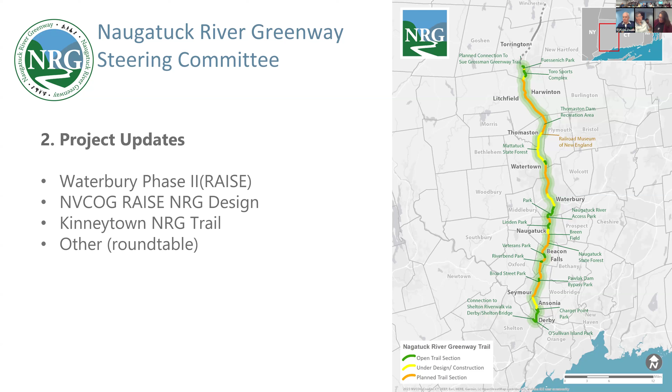Have you obviously given money out already? Yep. Has anybody completed anything, or have they actually spent the money yet?

Oh yeah, it's for small stuff like bike helmets and things like that. There's been a lot of events in different regions, mostly bikes and helmets is probably like 50% of the items being purchased with the money - things like bike rodeos, they give them out to the kids and things of that nature. A lot of the money has been spent.

That's great. I know the town of Warren did a back-to-school bike event - they all met and rode their bikes to school. It was kind of cute and there's a bunch of photos.

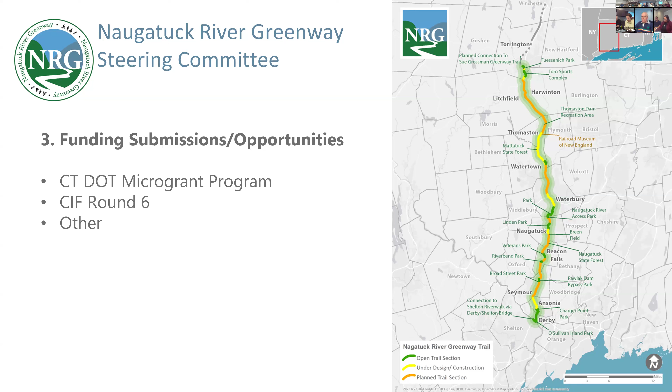Event and public outreach: the Connecticut Trail Symposium was October 4th, at Manchester Community College. I thought, maybe I'm a little biased, but I do think it was a great event. We had some great presentations and a lot of great feedback. I think people enjoyed the tabling events.

I know Kim sent out a survey to get some feedback, and we're going to be meeting in December to regroup and start already planning for next year. I don't know if Kim wanted to give any more of an update, and I would love to hear from anybody else who attended, to what your thoughts were on it.

Yeah, and I know we had a great response for the NVCOG presentation as well. So for everyone who put forward presentations, I'm gonna try to get that disseminated and the information back out to you. Great feedback. I think what we acknowledged as well is the need to increase our timing so that we have things planned out and information released a bit earlier. We get a little constrained as we see how other groups are doing it.

I also went up to Mass Trails to see how they put forward their event. It's huge, but they also have a staff, I found out Massachusetts has a staff of 10 people. They've increased from 2.5 to 10 people within their trails program. But it was a great opportunity to really see how they ran things. And I'm working towards, I've been given the approval to get at least a seasonal staff member, who I think it's a great opportunity for someone working for a subset of time, for really networking and potential job opportunity growth.

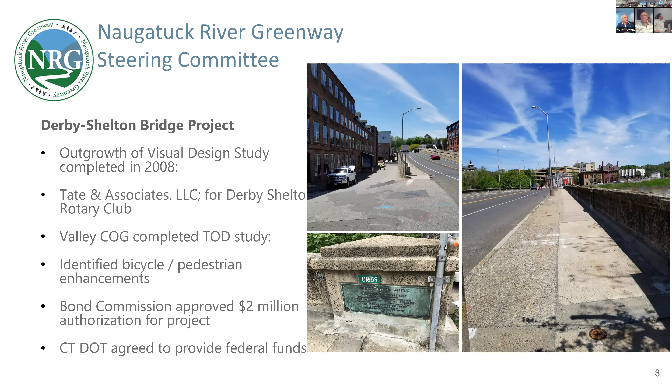It's the exact same width as it was. It's like an optical illusion, but people do think it's a wide bridge. It's not. Before, I think the sidewalks were 8-10 feet, with 8-foot shoulders on either side and 12-13 foot lanes. The lanes were even wider. So it's like you didn't need all that space, and you don't want people to speed across there anyhow, so let's narrow things up.

There are planters along between the cycle track and the lanes that will eventually get planted with something. We're thinking probably not until the spring, given the time of year, but that should be really nice. And I think the parapet wall, they did a real nice job on that.

Great job. There's a YouTube video from the dedication yesterday as well as on Facebook, and several other videos with flybys, so you can see it from all kinds of different angles. If you go out to Facebook and YouTube, you'll find it.

Move on to Route 34.

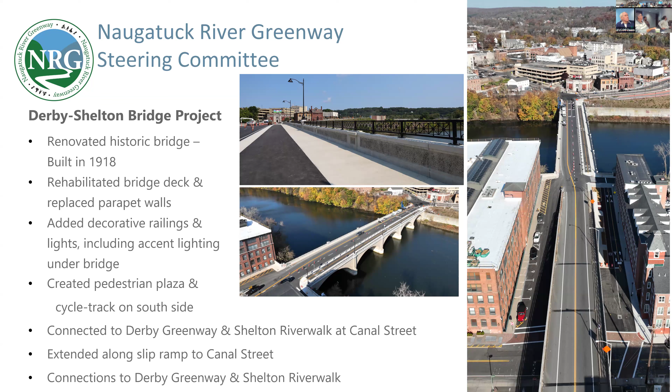I guess I gotta stand up because nobody's here otherwise. Oh, God.

Yeah, so anybody who's driven through Derby in the last two years- there are slides here, one for the purpose of engagement and interactions. First of all, because I don't think everyone knows me, I'm a professional engineer.

I've been with the COG for about 9 years. I have experience with DOT, I've worked for DOT, I've worked for a municipality, and I've worked for two different contractors, mostly on road jobs. So this is how I ended up, for the COG, managing the Route 34 and bridge project.

The Route 34 widening has been in the planning stage for at least 15 years, like since 2009, and Mark's gotta help me out because it was before my time. Let's say at least 15 years, yeah.

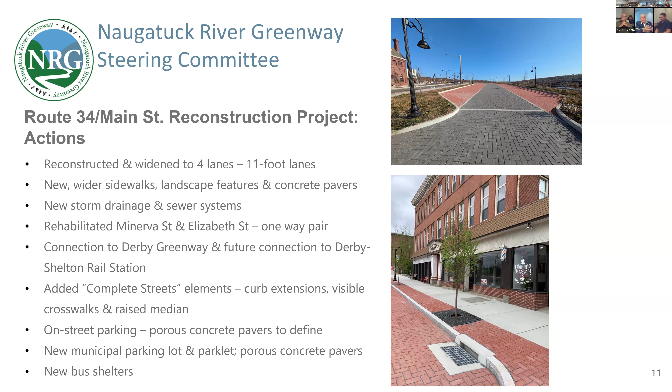Right now Derby has that apartment building, right there. You saw it when you came in. He's already taking reservations, so he's doing some inside work, and most of the exterior is completed. Hopefully early spring for the certificate of occupancy.

There's another apartment house, about the same size, if you go back. If you look to the right-hand side of the picture and go up, you see a big structure - that's the village. You're getting ahead of ourselves. Oh, okay, well I saw it in a different picture. I didn't see it in the other one, so I just wanted to point out that's already open, and 60% sold in the space of the first month.

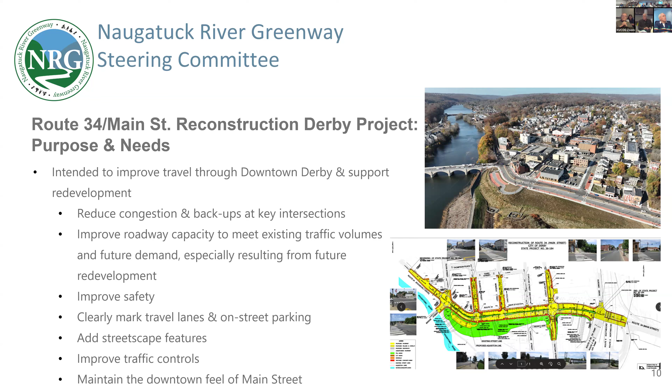We should move on to the fishing pier. Is that me too? Yeah, you can start it. Well, I came in at the tail end, so I don't have too much of the background, but...

NVCOG, how many years ago, 8, 9 years? So back in 2012, the project started when my predecessor, Arthur Bogan, secured an EPA assessment grant. We started assessing there, and while they were doing the testing, a couple issues showed up, so that led NVCOG to secure some DECD funding. They received $200,000 for the proper assessment of the entire island.

I guess we got that money because GE polluted the river, up in Massachusetts. So once we assessed the island, we knew what was in the soil. GE polluted the river with the release of some PCBs, so then they had to pay restitution, or whatever they call it. So they secured a $325,000 grant to be able to build a fishing pier.

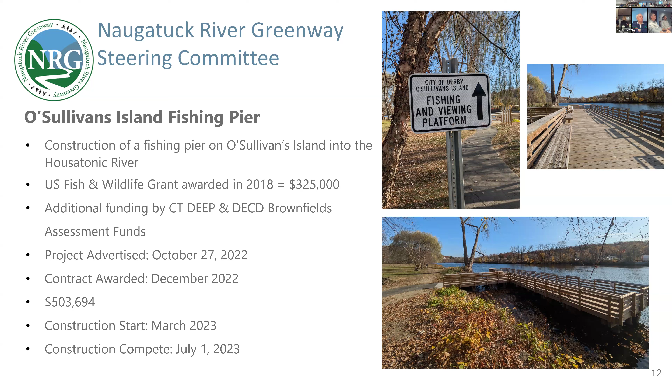Should point out that O'Sullivan's Island is not an island anymore. It used to be, but it was filled in when they were building the Commodore Hull Bridge. And also that stretch of land to the side was the subject of a $4 million brownfield cleanup years ago. They used to do fire training there, but even before that there was a lot of industrial waste dumped there illegally over the years.

So to the point of transit-oriented development in the area, the Derby Shelton train station, along with all of the other train stations up and down the Waterbury line, are under design for really significant upgrades. I'm sure you've all seen news about the state having ordered new equipment for the branch lines, the non-electrified rail lines in the state. One of the elements with that is that we need high-level platforms, which in addition to serving the new equipment will make for faster and easier boarding, and will make all of the stations along the Waterbury line ADA compliant.

Does this have a laser on it? It does, but it doesn't show up on the screen.

In addition to a new platform right behind this wall, the historic train station building itself will be renovated and restored to use as a train station. It'll be a central passenger waiting area with some small vendor space, and space for bus and train operators to have break room space. It'll be a great opportunity for passengers to both wait comfortably and access the historic nature of that building.

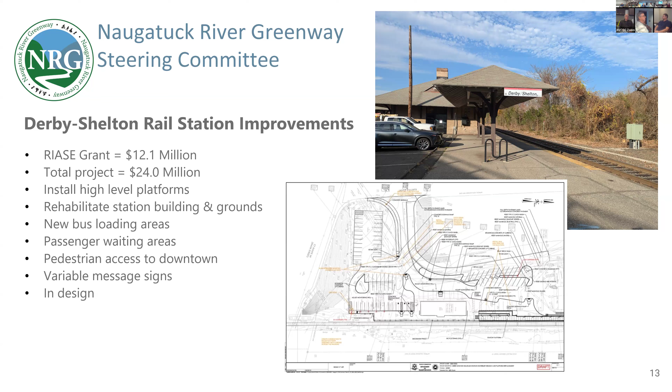While there isn't a direct connection to the Greenway, the station plan itself will include a cycle track that connects to that section on Route 34 behind Home Depot. So hopefully as the Route 34 project and the Main Street South projects come together, we'll be able to make that a safer, more real connection.

So going back to development, as Aaron mentioned earlier, completion of the Greenway, economic development loves those areas. Here's one of the first examples of the complete project for the city of Derby. This one started back in 2016 with some EPA assessment funding.

With this one, one of the main issues we had was groundwater was really, really deep, and we needed that groundwater data to prove that the site was in better condition than what was stated before. So in total, somewhere close to $100,000 worth of assessment work.

That assessment work was able to minimize the cost of remediation moving forward. NRG was able to sub-grant the city $290,000 for our LEP oversight, and the Connecticut Brownfields Land Bank, Inc., a sidearm of the Naugatuck Valley Council of Governments, was able to secure $650,000 for the actual remediation. I'm happy to announce we actually came in under budget, only allocating somewhere close to $370,000. So the project came in significantly under budget.

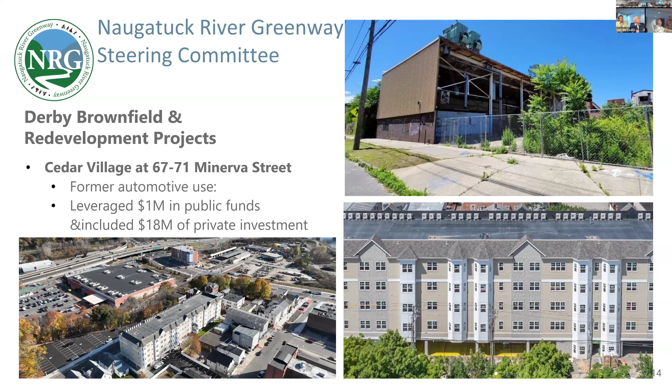So in total, we have somewhere close to $1 million of public funds invested by the state and federal governments, but yielding somewhere close to $18 million in private funds. So that's an 18-to-1 leverage. Really, really good.

Another project that NRG has assisted is 90 Main Street. The whole area over there is considered Derby Main Street South, and within that area, we received $200,000 from DECD to assess the project.

No, 25% are below market rate. That's really good.

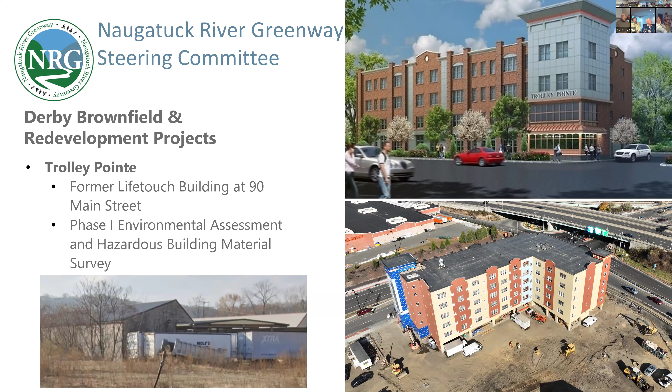Next, what we're working on right now within Derby Main Street South is collecting environmental subsurface samples of the scrap piles when available, and that's going to determine what level of cleanup efforts are required on this project.

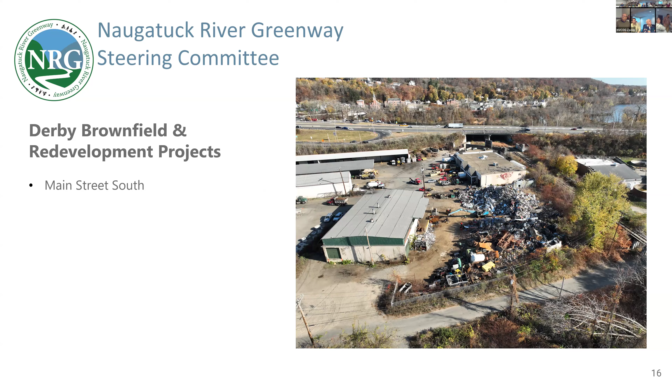So there's a lot going on in Derby, and it's all within like a 5-minute walk from here. I think we could end the meeting and go for a walk. I'll suggest we go up Route 34 to the Derby Shelton Bridge, and if we have time, along the trail to the fishing pier, if that sounds good. There's some donuts too, take some after the walk.